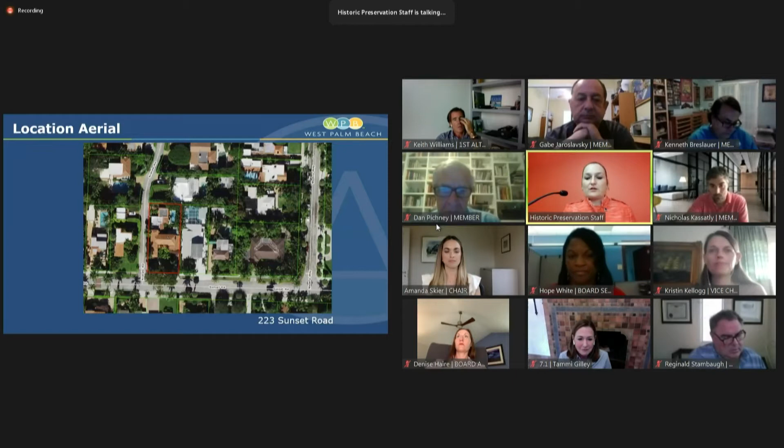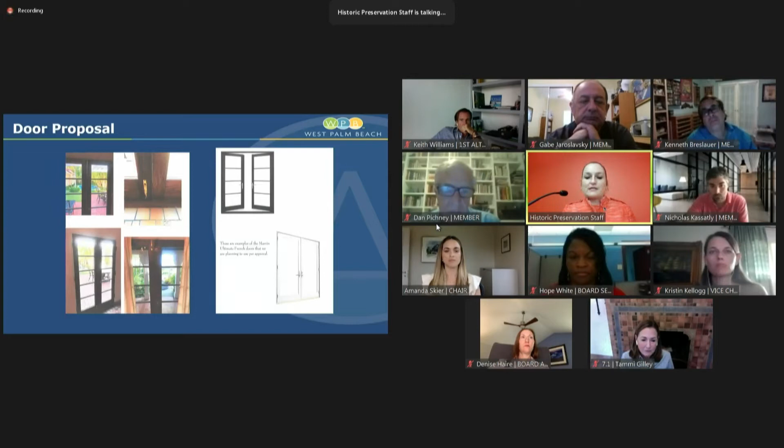I apologize, I will just run through quickly again the location aerial of where the property is. Again, corner lot, visible front of the home. The 2 requests: the doors, which staff has no concerns about given the water intrusion, and the roofing material that's being proposed. This is, again, a close-up of the corner where you can truly see the distinction of the individual pieces.

And Ms. Gilley presented several properties - I would have to research how those have an S tile. I agree they're very nice roofs. I don't know if it was previously board approved, if it was a hiccup in the permitting process, and how they ended up with an S tile versus a true barrel.

But we do believe there's a lot of work and investment in this property, and I recognize $12,000 is a significant amount of money, but we do not believe, even with this nice clay S, it meets the true barrel tile in relationship to each other, and again, given the highly visible nature. We don't believe it meets Secretary of Interior standard number 6 because it does not match the old in design. Therefore we are recommending that the board approve a true barrel tile.

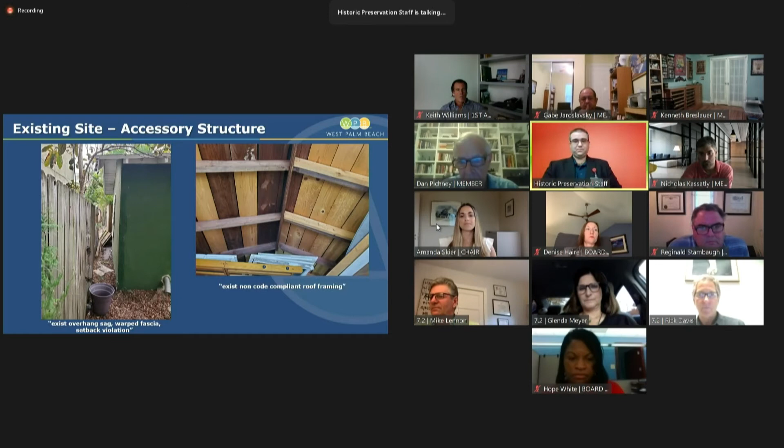And on the right, we have existing non-code compliant roof framing. This is the engineer report, and it is in your packet towards the end. The engineer is just stating that the detached garage violates many structural and code issues, and for all practical purposes, it should be removed.

They're also stating that the structure is not capable of handling a C exposure wind event, and per the building code, it does not comply. This is a historic structure which would have exemption, as existing buildings are allowed to continue to exist as is. They don't have exemptions like historic properties there.

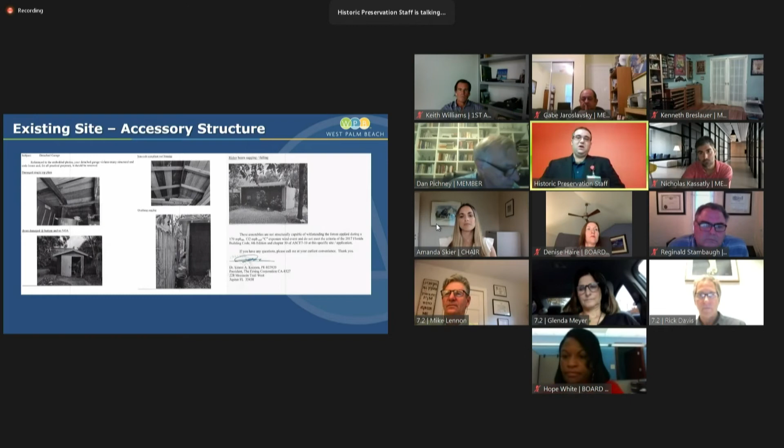This is also in the packet. This is just a few neighbors who did support the project. And review criteria for demolition.

The applicant submitted a structural engineering report which summarizes the structural deficiencies of the structure, but does not state that these deficiencies cannot be resolved. The letter states that the current building does not meet code for withstanding the forces during a C exposure wind event, but a historic building is exempt from this requirement. So staff has determined that the applicant has not provided sufficient information that justifies demolition of a contributing accessory structure.

Therefore it doesn't comply with the historic preservation ordinance as well as the Secretary of Interior Standards number 9 and 10. Staff is recommending denial of the application. However, if the board does feel that the demolition is appropriate, these are the plans for new construction.

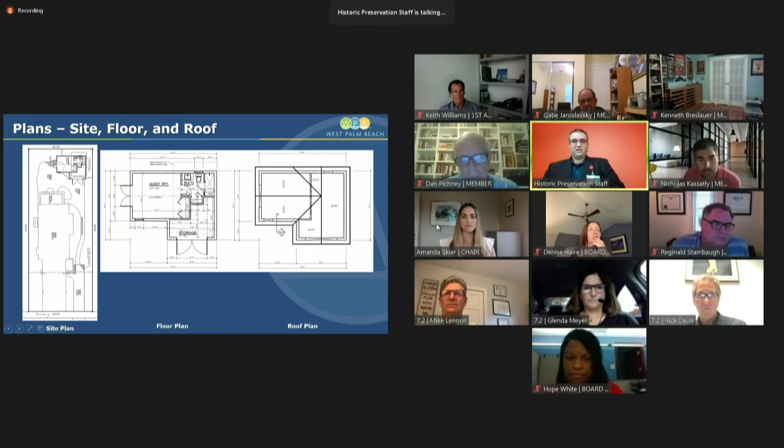So here we have the site plan on the left. It would meet all setback requirements. They're even expanding their driveway to ensure they meet the code for off-street parking. There's the guest room with a bathroom as well as a storage space.

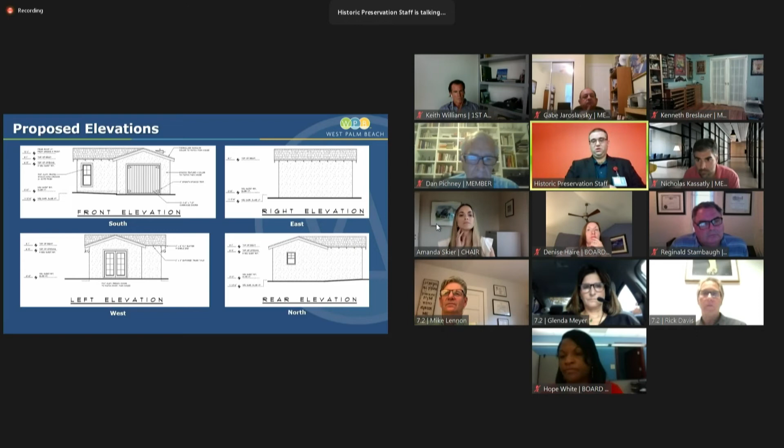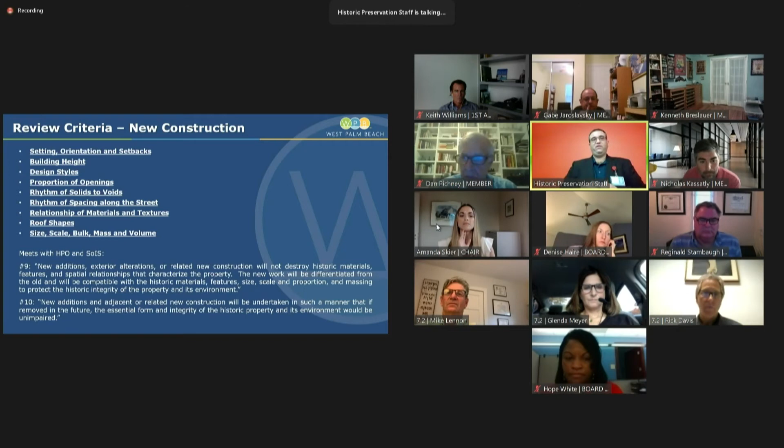These are the elevations. It has a cross gable roof with the roof rafters, same as existing. It has a couple 4x1 windows as well as a paired French door and a carriage style garage door. For new construction, it does comply with the historic preservation ordinance as well as the Secretary of Interior Standards number 9 and 10. It fits very well within its place for new construction.

Therefore, staff would recommend approval for new construction if the board approves demolition, with two conditions to ensure full compliance: all windows and doors shall have a white exterior frame, clear glass or clear glass with low E coating, and exterior dimensional muntins. And lastly, a minimum of 50% of the wood for the structure shall be salvaged and reused on the property. Thank you.

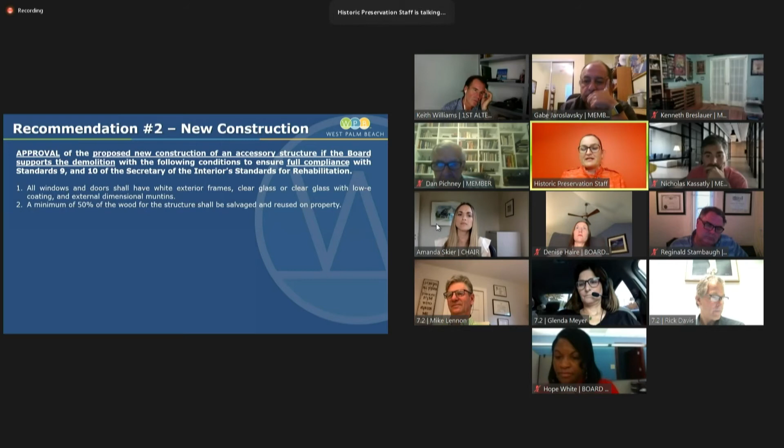I think what the applicants have stated is once you start doing that, it just opens a can of worms sometimes when you're trying to fix it, but I didn't realize it was as high as it was.

Yeah, the survey says that the existing one-story residence is at 27 feet. The accessory structure is at 24.56. What I can see in the survey is on the top left corner of the property, that is the highest point at 24.9. So that corner is above the finished floor of the accessory structure, but all the rest of the area around the accessory structure is about 24 feet, which is 6 inches below the finished floor in the structure.

From my research, I found that there was a permit done in 2003, again this is prior to me, where the driveway and the sidewalk were put in, and it was permitted and approved. That sidewalk runs water right down into the shed, and has been doing it for years. When I found out that it was below and I'm having water in there, I looked at why this is happening. Something that was permitted and approved has been causing more damage since 2003 at least.

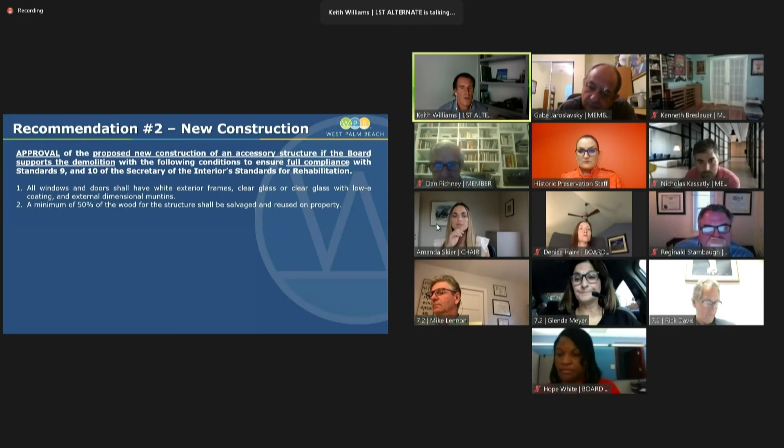Yes, her driveway is higher near the front of the house, pitching back towards this accessory structure, is what's happening.

I'm not sure of the accuracy of these elevations, but from the photographs you can clearly see the left side of the building, the patio is above the carriage doors at the front of the building. Yeah, you have your northwest pitching back toward the building and your southeast pitching back toward your building.

Not a good situation. The photo labeled existing sag in roof is a good example of the grade being higher than the bottom of the doors. You can see it from the other existing door too, the photo that says existing doors rotten from standing water. You can see the left side is, the grade is elevated.

That's not labeled on the survey though, but they didn't pick the areas that should have been highlighted, or there's an error. You can see it clearly in the photograph though.

Ms. Mittner, I have another question for you. Do you agree with Mr. Bordengraber's assessment that these issues are the result of deferred maintenance?

I think they are a combination of deferred maintenance and, obviously I haven't studied this case as much as he has, really improper site treatments. Looking at the images and hearing the testimony, this raised patio hasn't helped the structure. I think it was poor decision-making in terms of the future impact on the structure.

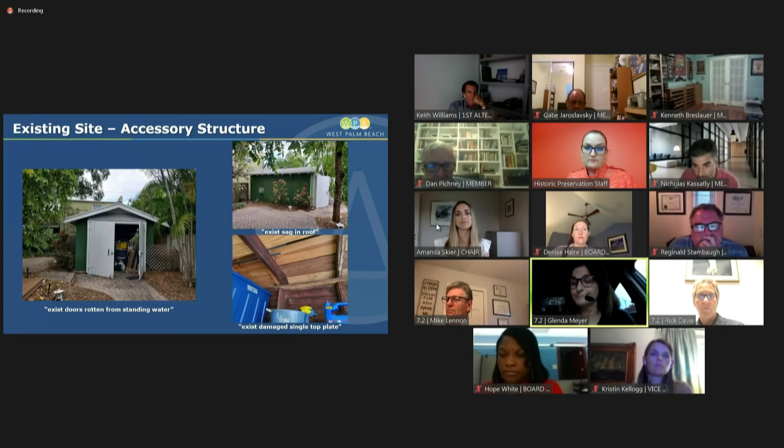And she has, I can confirm that, she has reached out to staff multiple times saying that every person she speaks to is indicating it's not repairable. But then we told her to submit an application, and that is the product in your packet.

Ms. Mittner, is there a possibility, I don't know if it's your place, to provide an approved list of historic preservation consultants that could jump on their team? No, right? No, can't do that. She's going to have to ferret that out herself.

Ms. Mittner, if they were to save that structure, wouldn't it essentially have to be taken apart anyway? In other words, a clean demolition, a very carefully plotted removal of all the pieces, laying it out and seeing what could be put back and what new fabric would have to be put in? In terms of salvage, if they're salvaging materials. No, we're talking about if we were to say that the existing structure had to be saved. From what the applicant's representatives have described, it would seem that the whole building would have to be taken apart anyway. I don't know, maybe I'm putting words in their mouth, but we're not seeing that.

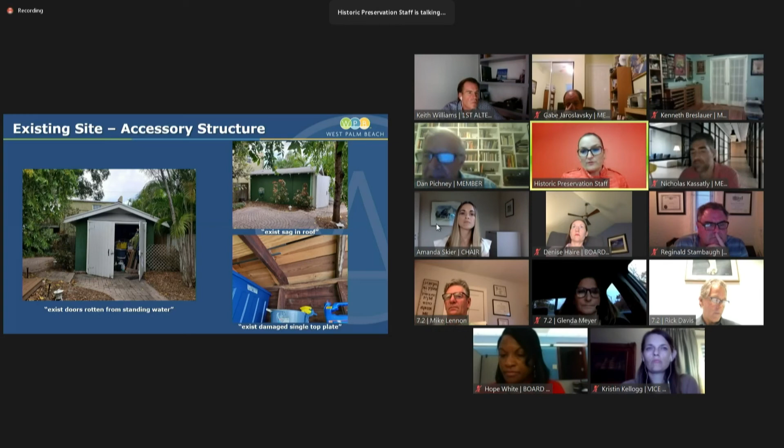Any further questions of staff?

Do we have any members of the public that wish to speak on this item? Madam Chair, I see no public comment.

Okay, thank you. We'll go into executive session. Is there a chance to speak one more time? No, sir, we're in executive session now. Thank you.

I would ask our two architects to kind of put their two cents in, in terms of how they think the existing structure could be retained and repaired. I think that's good advice.

So in looking at this structure and talking about elevating it, it is a substantial amount of work to elevate a structure considering how small it is. With the notes that Ms. Mittner made about it overall kind of lacking character-defining features.

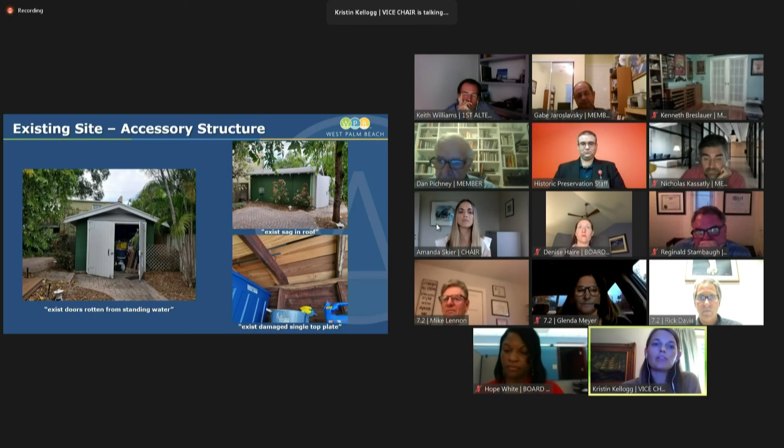Thank you. Mr. Jaroslavsky, do you want to weigh in?

No, I agree with Kristin, because the problem here is that the evidence presented really doesn't support the demolition, because it's all about code compliance, which a structure like this doesn't have to comply with.

What I am seeing here, honestly, is that we have a historic structure that was always used as storage, and now wants to be converted to a living space. And it's extremely difficult to do that. Like Kristin was saying, raising it is possible. We approve moving whole houses from one place to another.

Actually, there is one coming up. But those are whole houses that we move from one side to another. So it's possible to raise it, but we don't have a definitive structural report that says this is not a safe structure to maintain, and that it needs to be demolished because it's not safe.

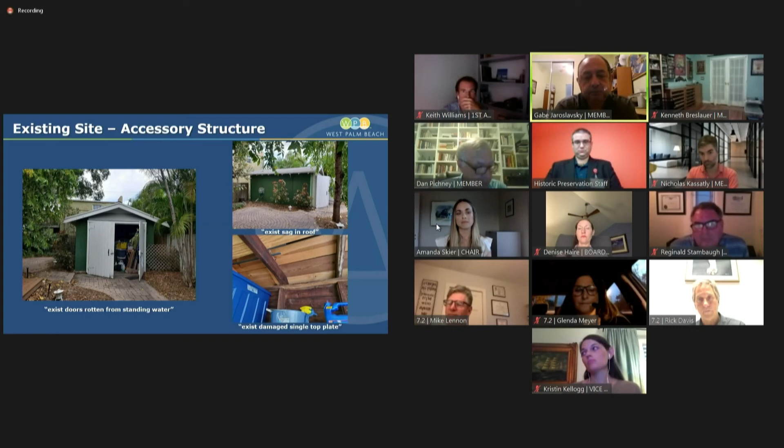If I may, Madam Chair, my thoughts are this: the applicant has spent some time on this and has gone so far as to have an alternative structure proposed, and the staff has approved with conditions. What's standing in the way is that there's no basis to justify the demolition of a contributing structure to this district, albeit an accessory structure.

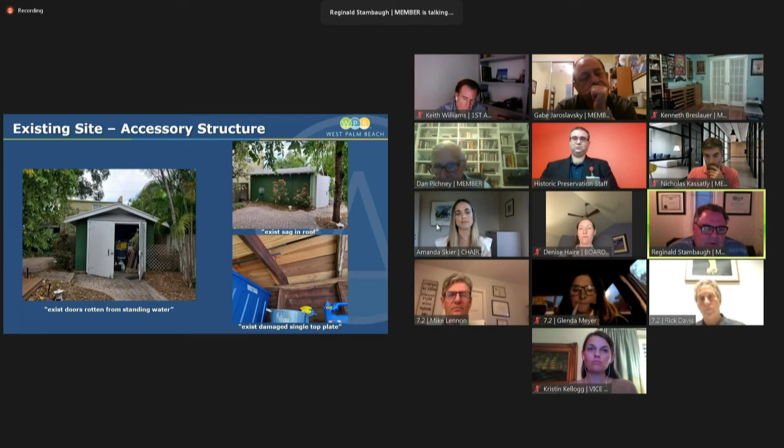If there is a path where the applicant came back with an independent expert opinion disproving the staff's basis, then there would be something to provide us with substantial, competent evidence to refute staff's recommendation. What's presented is not there, and if the applicant is not able to obtain that type of opinion, my feeling is that the applicant could work with staff on an adaptive reuse of this structure.

I understand the economics of this, though. 90% of construction experts or professionals say raise the building, build new. It's so much more cost effective. Trying to work with an existing structure can be very expensive. So there's a struggle here.

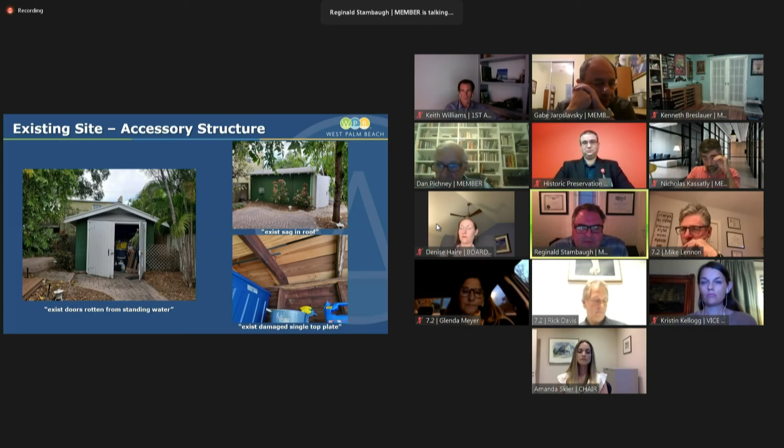When on its face, not applying the facts to the law, we'd look at it and say, oh yeah, higher, better use—let's tear down the shed and put in a new structure, which would be much more favorable. But that's not what we can do here. So my thinking is to ask that the applicant go back and work with staff to see if they can come up with a solution to save the structure, not just 50% of the wood.

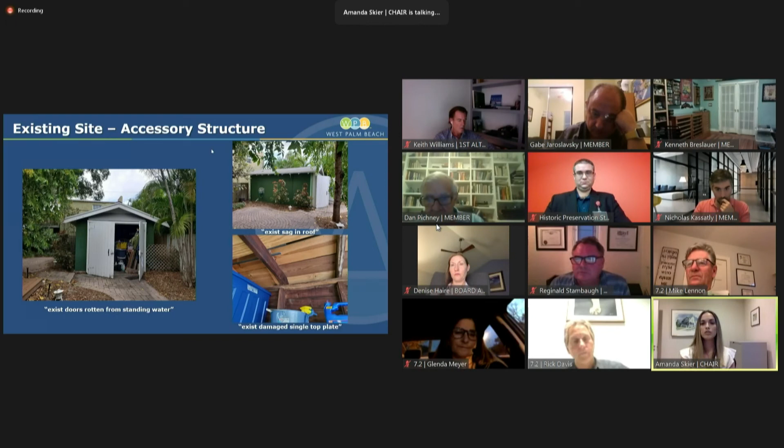I think that's a good suggestion. Ms. Meyer, I'd like to invite you to comment on that suggestion.

Friederike, wouldn't you think I've already been doing that? Did you hear me? Oh, it's not Friederike. I'm sorry, I stepped away. We're trying to keep our distance. I guess what I was trying to say is that I thought I've already been doing that.

Originally, I'm not saying from the beginning that I wanted to not have a building. It's been painted, I don't want it to look crummy. When I look at the pictures, it doesn't look as bad as if you looked on the inside, where the whole bottom board is missing. The support is being held up by the stucco. The stuff in there can only store junk, things that cannot be ruined, because water flows into it. I don't know.

I've worked with you, Friederike. I guess you've seen I've never said I just want to tear it down and build something. That's right from the beginning. From the beginning I said, what do you want? What can I do? And so I think the crossroads we're at is the addition component.

Or a secondary structure, and that obviously is balancing what you wanted with the trees. And I don't think we have the information on what trees you're trying to save. So, Gumbo limbo and a ylang-ylang back there. There's beautiful trees in the backyard. There's the paver part, some of that was going to come off anyway.

So I think you can perhaps continue to utilize this more as a storage space, and since you weren't proposing a very large structure anyway, almost have it right adjacent to it. So the tree will have to come out. The tree will have to come out.

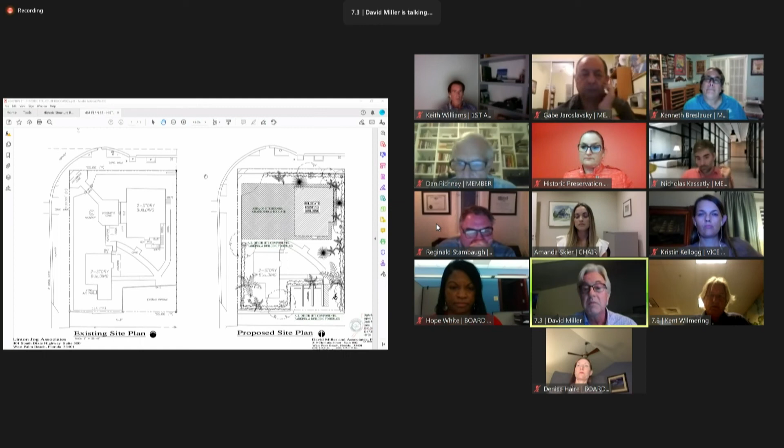Let me share the screen this time. Okay, we'll start here. This is showing what we're proposing will be done. You can see the Riddle House here and the adjacent residential structure. When it's planned to be moved, it will need to move to the west to be able to go up Quadrille. I believe y'all probably saw the relocation of the other house several weeks ago, and it will be taking a similar path as it goes up the street.

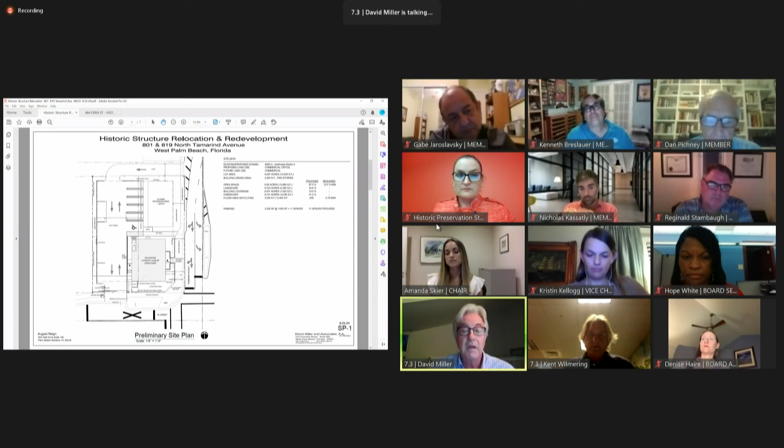This is informational for you, but we did submit a site plan approval set of documents to the city's planning department, because the property in question is within their jurisdiction, not in the historic district. The house itself, when relocated onto the site, will actually be fronting onto Tamarind Avenue, and the side of the house will be at 7th. The current back of the house will be at the rear where we placed parking. There is some future expansion area on the site, and access into the site is going to come from the alley. We've worked closely with staff at planning and zoning on this, and have tried to keep Friederike in the loop in terms of what we're doing.

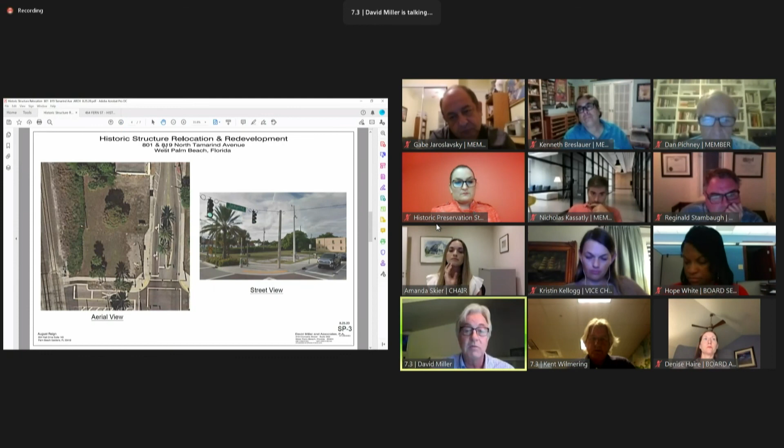The existing lot is vacant presently. It was purchased some time ago by the CRA, and this really is a very important redevelopment corner and area for the city. So I'm actually pleased that we get something started here, which is great. The house itself is intended to be just restored. It will need a new roof, it will need new windows. There are some minor repairs that might be exacerbated during the move, but the basic layout is actually very conducive to my client's future use. The end user is going to be a construction company, and they will ultimately buy the property from the CRA. So we've got several parties involved in this, and the hope is that it all comes about the way we'd like it to.

Happy to answer any questions you might have about it, and have read the staff report.

The one item that I requested be clarified is that the house receive a designation at its new location. My understanding from reviewing this with Friederike is that it will actually be the CRA asking for the designation. I'm not certain when the end user would get in there, and I can't say how quickly we can move it, but we would like to do it reasonably quickly. Happy to answer any questions you might have.

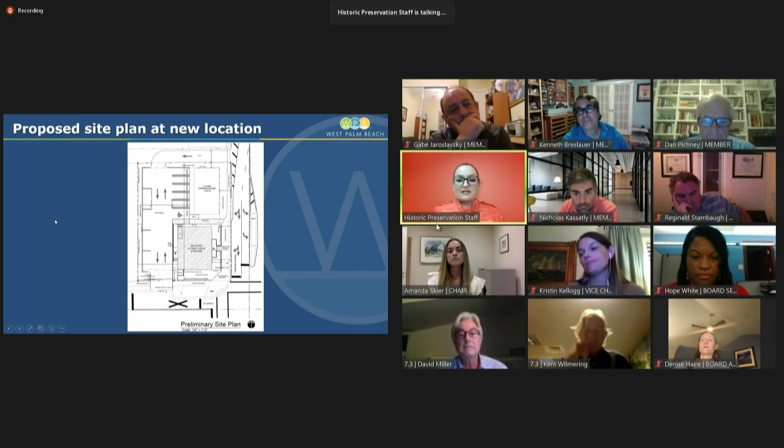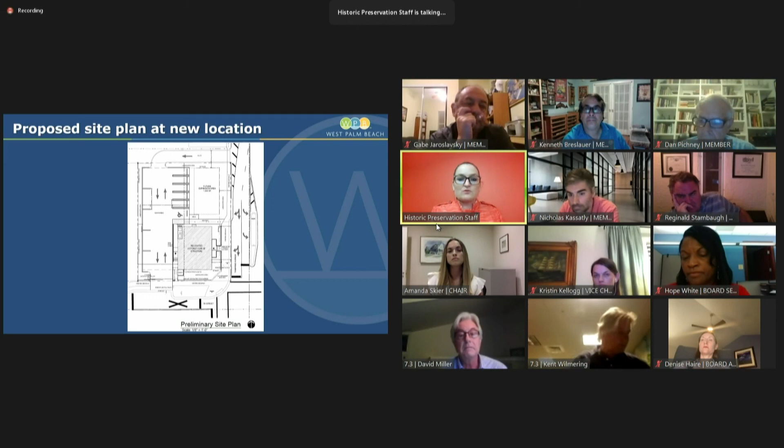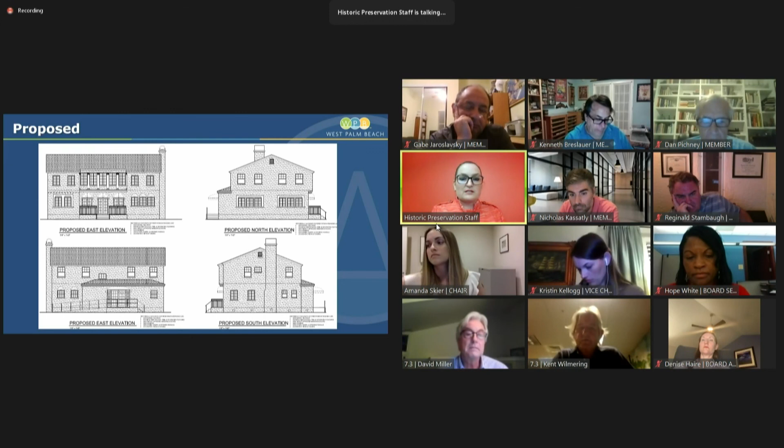What we like is that it does address the corner. We hope that the future improvements will also fall under our historic preservation ordinance by being individually designated, so we do have say on those modifications. What has been preliminarily presented is in keeping with the existing Mediterranean revival, but the details, as they come forward with the new construction company moving in here as their office space, would be further evaluated.

So we do believe it meets the zoning and land development regulation section 9449, the terms of relocation. None of these exist to deny a relocation, and we believe it's an appropriate site and are recommending approval, just that we do redesignate it and therefore review any additional modifications. I've also spoken to Mr. Miller as well as Gina Baker in the CRA that once the move happens, we include some fanfare, have a banner on that building, and celebrate the relocation. That concludes my presentation.

Have you reviewed the conditions with the applicant? Yes, and we agree that the redesignation will be something that city staff and the CRA undertakes. Okay.

Ms. Mittner, if I may, is this the Riddle House? The way I remember it, this is not the original location of the Riddle House—it was actually moved in the 90s, isn't that correct? Yes, that is correct, and that's why we are fine with it relocating again. It was a residential use initially in the Hillcrest neighborhood, and it's been converted to commercial use, so we believe it's fine to be relocated again. If I recall that move, there was some conversation—I don't know if it was ever concluded—that Mizner was actually the architect of this house.